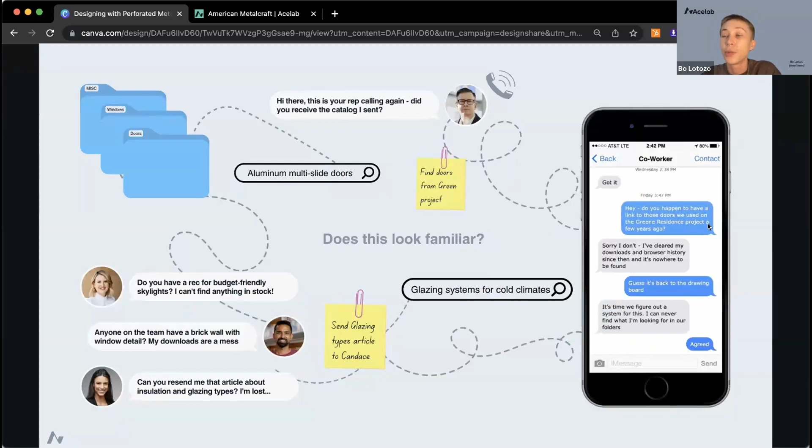So this is a little example of some of the workflow issues that we were looking to solve. So the ability to get in touch with people at the right moment, to find information on products from past projects, and to really just have one place where you can go through your whole specification workflow, from the research stages all the way to the contacting professional stages, all in one place, as opposed to spread out over Post-it notes and text messages and different project files.

All right, so with that, I'm just going to jump over to Acelab, quickly show you how to find American Metalcraft and get in touch with them. And then after that, we're going to get started with the portion of today's event that's the AIA-approved course. All right, so once you log into your Acelab account, you've got a handy dashboard of all of the work that you're doing. We've got all of our searchable product categories up here, so you can use these to discover and explore all of the products that we have in our database.

And if you know exactly who you're looking for, you can use this search bar right at the top. Type in the name of the manufacturer that you're looking for. That'll start to populate with some options. And then you can just head right over to their page on Acelab. You can get in touch with them directly here using this handy little contact button, and you can explore their products, their information right from this page. So this is a great way to explore and evaluate their products.

You can save them to your account, save them to your projects, and really have all of your research, your organization all in one place, and you can even message through the Acelab account as well. So it's a super great way to get in touch with manufacturers and to keep that information organized.

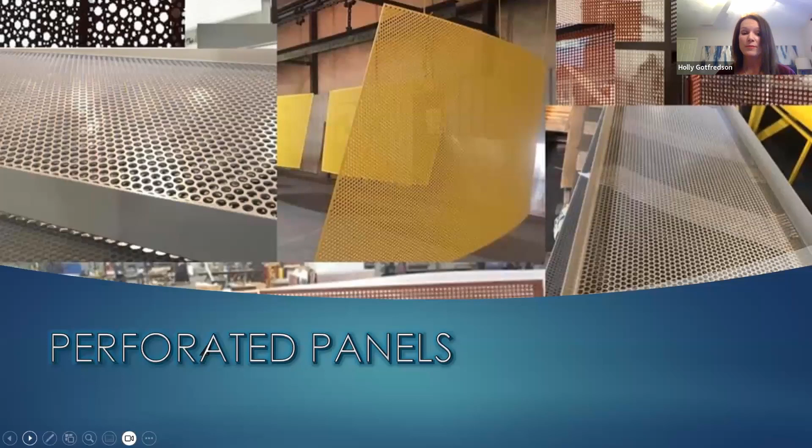So let's jump into today's topic, perforated panels. We have a couple of learning objectives that we want to achieve today. We want to talk about the difference between coil coat and post-fabrication finished products. We want to understand the basic decisions, how to choose a perforated product, and how each of those will affect cost. Looking at the different pattern options that may be out there, and also want to understand how those pattern options affect flatness, metal thickness, and also how we're going to assemble that and attach it to the building.

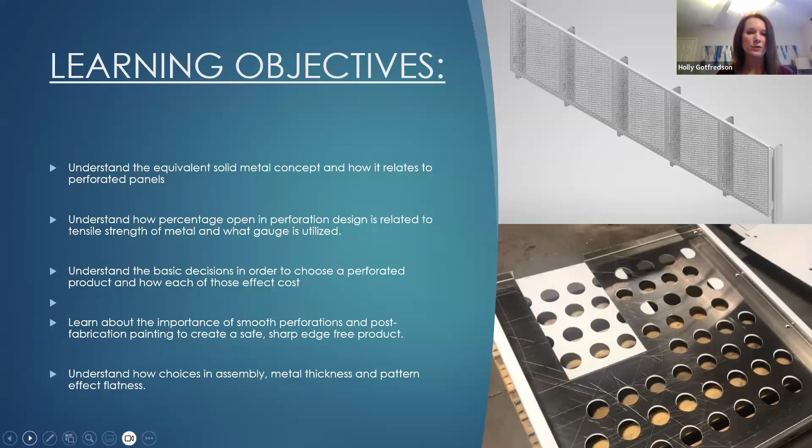So some advantages of using solid plate aluminum products is it's 100% recyclable and non-toxic. It's impact resistant, it's non-sparking and non-magnetic. And most importantly, it's non-combustible. So solid plate aluminum is NFPA 285 compliant naturally. It does not burn. We also have PVDF coatings, which are applied to those solid plate aluminum products, and that PVDF coating self-extinguishes. It has a very good strength to weight ratio and can be joined in many ways.

So we've noticed some confusion in the market about the differences between coil coat and plate. Most coil coat is going to be a thinner gauge. You may be looking at, what's the difference cost-wise between those two products? Well, with coil coat, let's start with the modules that you can make with that. The modules typically are going to be very small, 1 foot by 1 foot in terms of panel size. And if you get larger than that, you're going to have to add stiffeners. And those stiffeners being added to that are going to increase your cost.

So it's better to go with the correct gauge for the engineering criteria and for the wind loads than using a thinner gauge to try to save a little bit of money. And then when you add those stiffeners back in, you still run the risk of getting read through or pillowing. The other difference, especially when we're talking about perforated products, is the interior of those holes. So when you perforate solid aluminum plate in its raw form, you're going to punch everything out, and then you're going to post-fabrication finish it, meaning that all those holes are coated inside and out, so there's no rough edges.

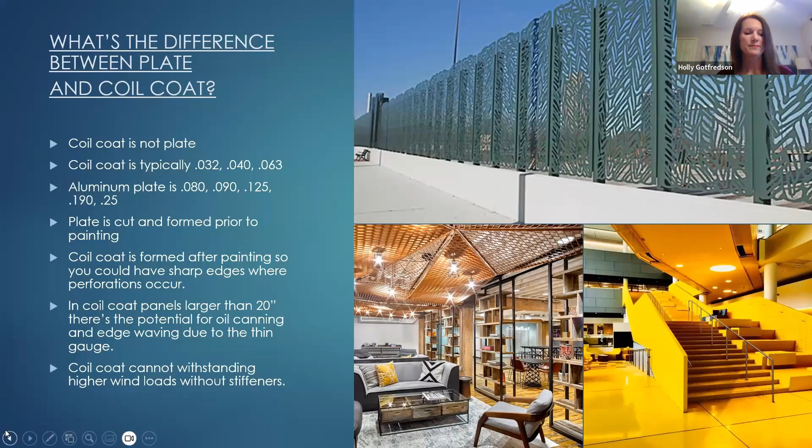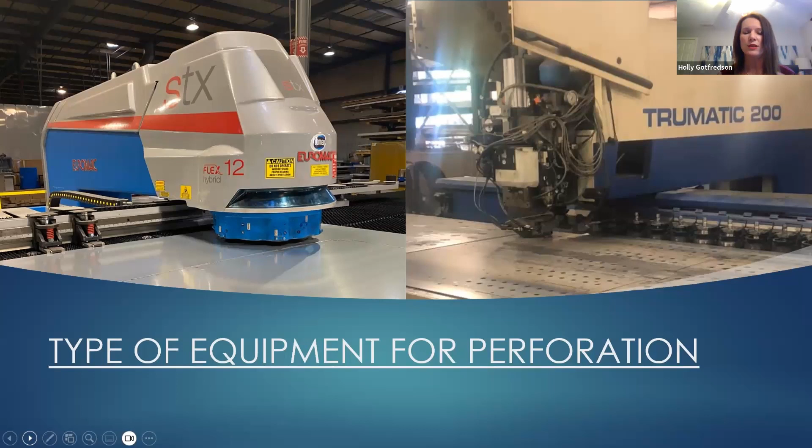You can also put a gang punch in those so that you can hit a panel once but create multiple perforations. So this is a good economical way to achieve a perforated product. Another way to do that, a little bit more on the higher end of things, is going to be a water jet or a laser type cut.

With a water jet, you can do a Harley Davidson logo, a corporate logo, all different types of signage. If you want a custom perforated pattern, let's say you want to have different hole sizes on the same panel, this is the machine that will allow you to do that. So the possibilities are really endless when it comes to creating a unique look for your project.

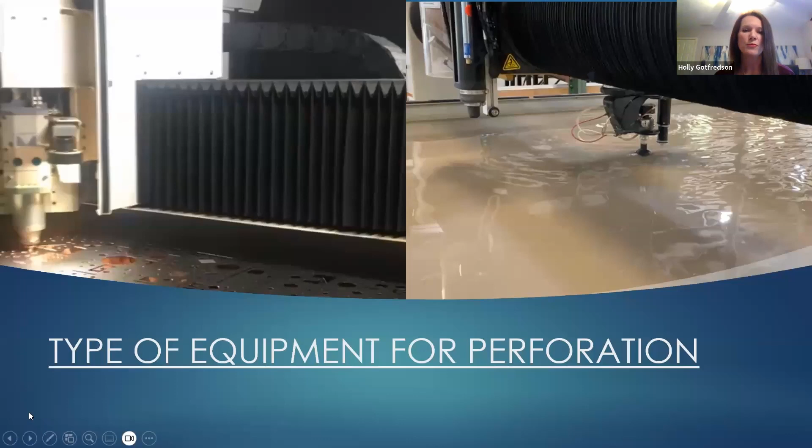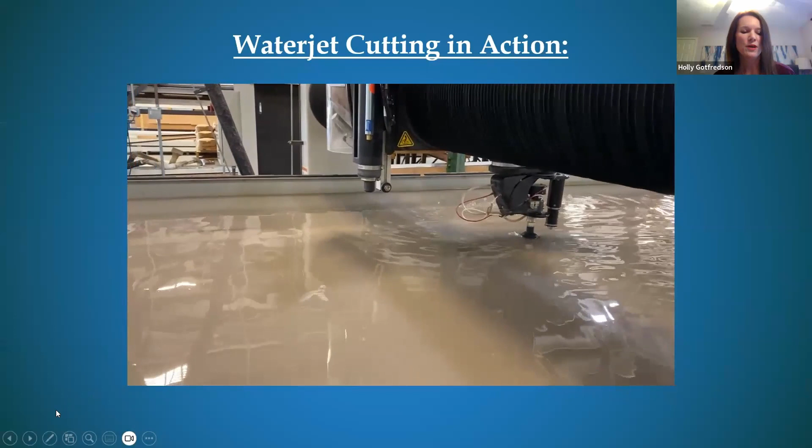Let's see if this video will work. Here's the water jet in action. We actually purchased one in 2020. It's the largest bed on the market. It's an Omax, and just killer technology. We're really loving the capabilities of what it can do.

Definitely, we want to talk about NFPA 285 and combustibility. I know most of us are probably familiar with what happened in Grenfell Tower. There was some ACM that had not been tested that was part of that exterior cladding. Unfortunately, that went up in flames very quickly and a lot of lives were lost.

So when you're considering different types of exterior cladding, you may have less expensive options. The right option may be a little bit more expensive, but you definitely want to consider the safety of the occupants and the longevity of the building. Solid aluminum plate panels are a great way to go because, again, they're non-combustible, they don't burn. It's just a great product where you can really feel comfortable about that choice for your project.

Let's talk a little bit about this: there are some products that are flame retardant, some that are flame resistant, and non-combustible. Typically, ACM and MCM are going to have a core with two thin sheets of metal on either side. That core may be fire resistant or fire retardant for up to 30 minutes. But the core is a lot of times made with plastics and things that may not be recyclable upon decommissioning of that building.

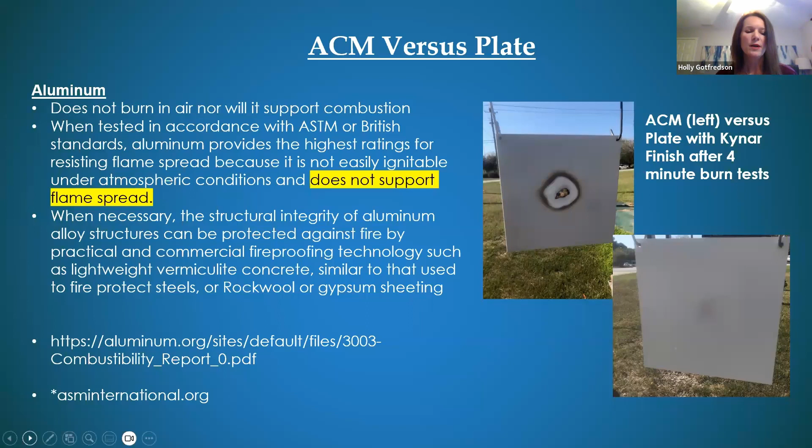So when you're talking about, again, perforating something, with solid aluminum plate, because you can post-fabricate finish that, you're assured that all those edges are coated, versus an ACM panel or a coil coat type panel where you're going to have exposed edges.

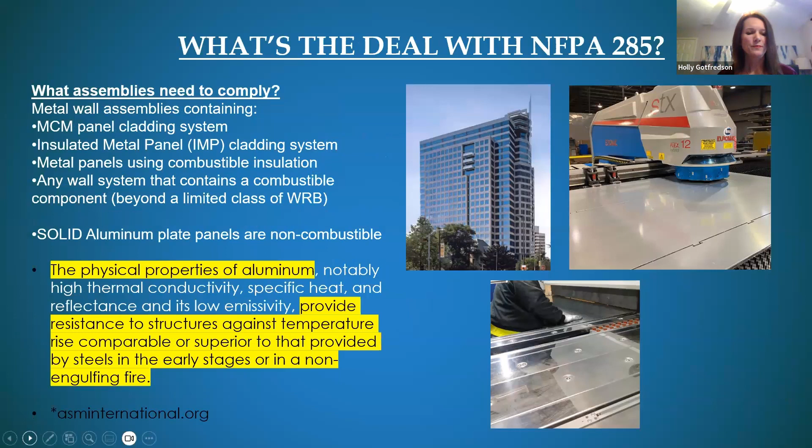So let's talk a little bit about the equivalent solid metal concept. The more openings and holes that you have, the less strength you have inherently in the metal panel. However, using thicker metal can sometimes offset the weakening of a more open pattern.

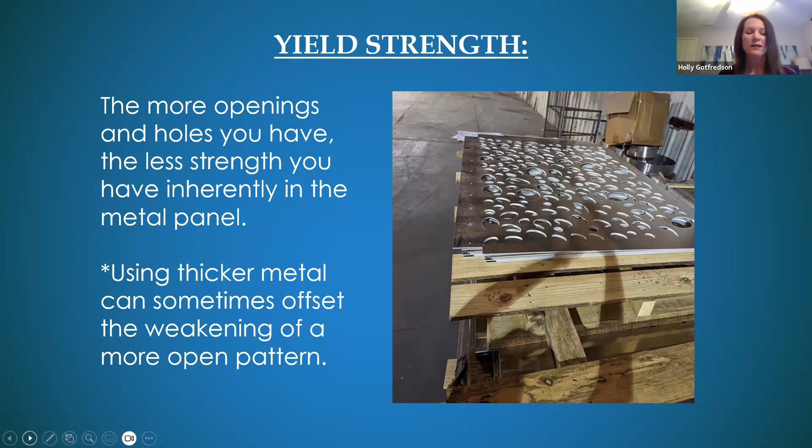So definitely have a conversation with your panel manufacturer, with your perforated products manufacturer, if you have an idea for a pattern but you're unsure how that's going to affect the strength to weight ratio, the openings and the brittleness of the bars in between. Definitely have that conversation so that you can choose the right gauge and choose the right pattern.

And here are just two easy rules of thumb for perforations. The hole diameter should be greater than the material thickness, and the bar width should be equal to or greater than the material thickness. So, Scott, do you have anything else you'd like to add as we're going over choosing perforated patterns?

Yeah, well, one thing to keep in mind is a lot of folks, sometimes the first time they see some perforated examples, they see all these tiny little holes, little 1/8 inch or 1/4 inch holes. When you get away from the building, they tend to go away. We kind of call that cheese grater patterns. We try to stay away from that.

Generally, most of these projects you're about to see are using a 1-inch hole when they're round holes, and that becomes pretty nice from street level view. So be very careful of those tiny little holes, and again, metal thickness is critical as well. I don't think we do much of any real exterior perforated panels that are less than 1/8 inch, 0.125.

I know we're looking at one to provide for MARTA that's going to be beefy, up to 1/4 inch. So, and like Holly said, a conversation with your panel manufacturer can help with that. But stay away from thin metal and tiny little holes.

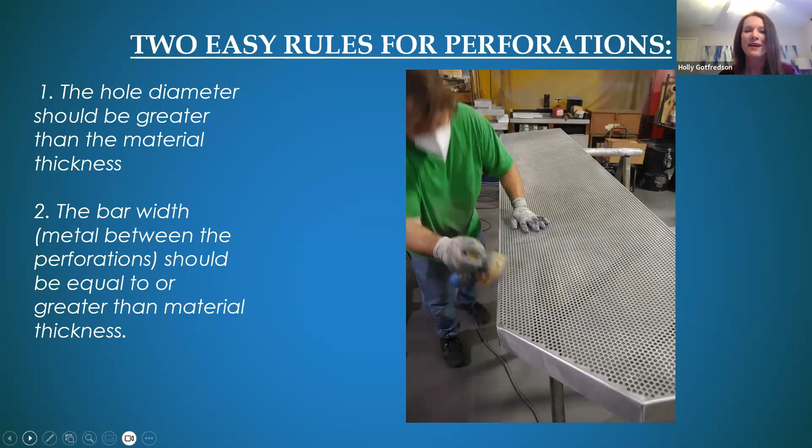Yeah, for sure. Thank you, Scott. And by the way, that's Scott Sampson, our national sales manager. He's coming to us today from Alabama. So thank you, Scott. How y'all doing?

So definitely something to think about is your panel size. What you want to do, especially for budget and using the material to the highest and best use, is to think about the standard sheet sizes that aluminum comes in. And you're looking at them right here on the screen, 36, 48, and 60-inch wide. So if you're thinking about doing a perforated panel with flanges, you want to allow 3 inches on either side for those flanges. So if we're thinking about a 30-inch face with 3 inches on either side, boom, we've hit that 36-inch mark, and we've used 100% of that panel.

Now, of course, if we're not there, let's say we get a module on a project and we unfold it and it's maybe a little bit over one of these standard widths. So let's say instead of 48, it's 49.5. Well, we just missed using a 48-inch sheet, so we're going to have to go to 60-inch wide. So there will be some drop, which of course will be 100% recycled, but there was an opportunity for us to save your customer money there. So it's just a great thing to think about when you're planning out your wall systems or panel modules. Utilizing these widths to the highest and best use will save money in the long run.

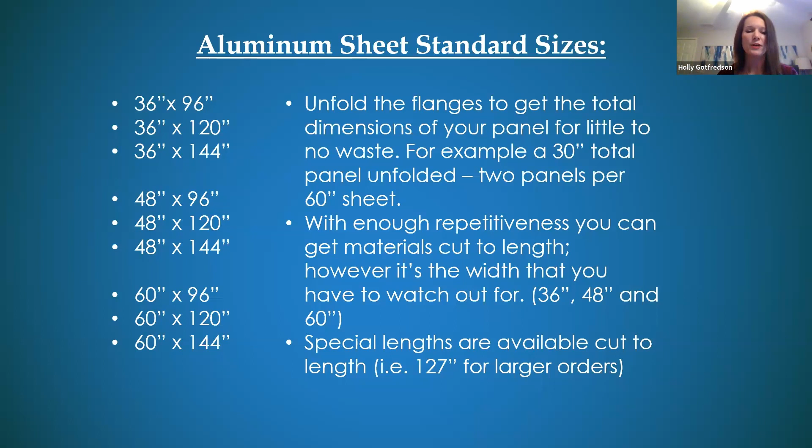We do have a chart of this on our website, so please feel free to use that as a resource. We have a frequently asked questions tab under one of the menus that you can go under and see these, along with some other really good Q&A type answers there.

Now, I didn't mention 72-inch wide, and that was on purpose. You might remember in 2017, 2018, when we had the metal tariffs, 72-inch wide had a pretty long lead time before that, but once the tariffs were implemented, we had a lot of peaks in the metal market. The scarcity of that material increased. And then add COVID to the mix, and it increased even more. So it is available, but please talk to your panel manufacturer before you commit or really get married to the idea of having this size panel module, just to make sure that that material and that width is available.

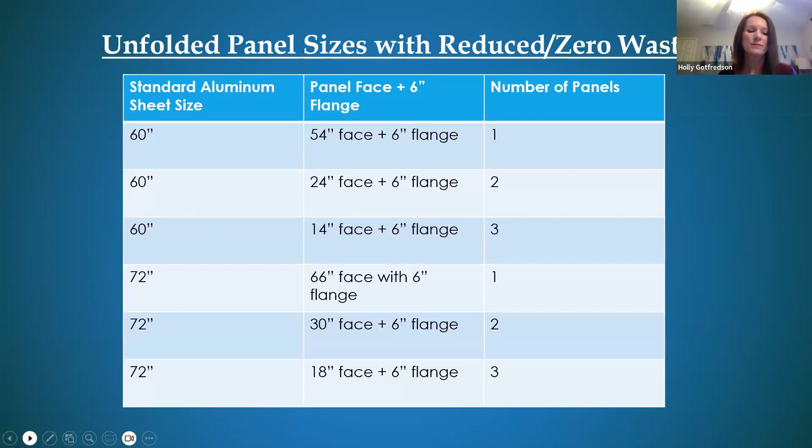So just some things to keep in mind as you're thinking about perforations for your project: the hole shape and pattern. The shapes created with the punch are going to be the most economical. Hole size, the spacing of the holes can't be less than the thickness of the metal. Again, we want to avoid anything getting too brittle, too thin that could break. The bar size, exact same reason. Don't go thinner than the 1-to-1 ratio with sheet thickness. Really think about your percentage open. Definitely try to stay under 70% so that we're not weakening that metal too much.

You want to keep your borders to a minimum to reduce distortion. And before specifying a custom pattern, definitely talk to your manufacturer about tooling, runtime, available material, and also pricing. This is a great opportunity for a manufacturer to really help you out.

If you've got a pattern that may be super intricate that you are just in love with, but it may be outside your budget, there may be a solution that lies in between, and that's a great conversation for you all to have. We offer design assist. I know many in the industry offer that, so that's just a really great opportunity for you guys to work together and come up with something that's going to be beautiful and economical for your project.

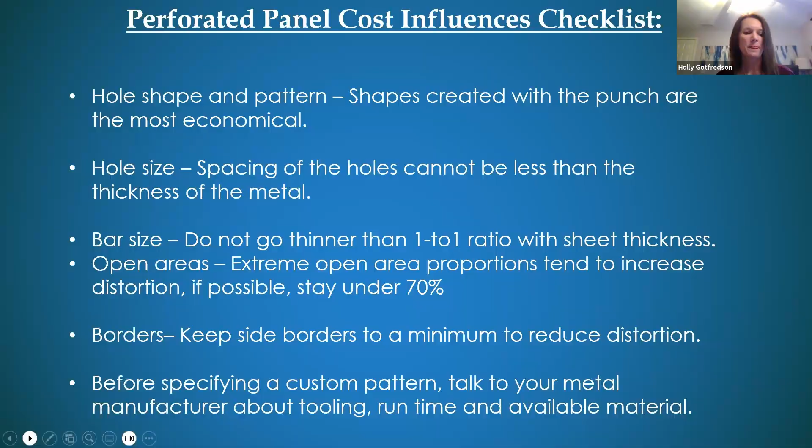So the aluminum metal standard sheet gauges are .080, .090, .125, .190, and quarter inch. And typically we see, for the most part, it's going to be .080, .090, and .125. Those are the ones that we see most often. When you get up into quarter inch, a flanged edge condition is not going to happen because that metal is super thick. So that's going to be a sheared edge condition in all instances. And the limiting factors of gauges are going to be the size of the panels and the wind loads.

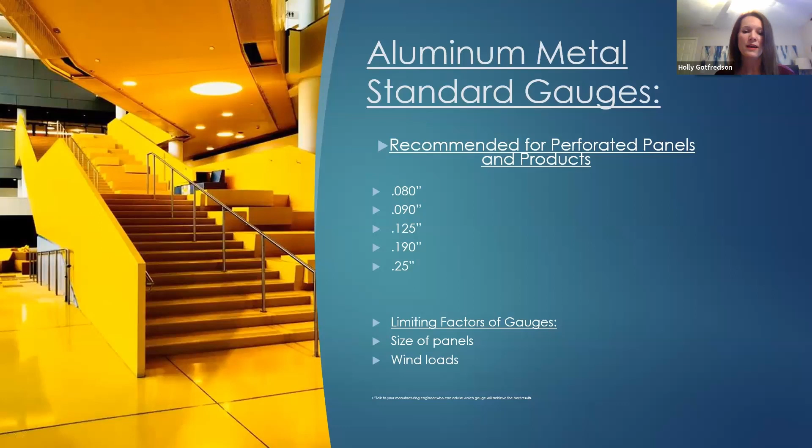And also you want to consider the processes that occur with anodizing versus, let's say, liquid painting. Anodizing is a chemical process. It's pretty harsh. It's very tough on the environment. You also may run the risk of what's called checkerboarding. So typically your perforated product or panel is going to be dipped in a dip tank for that anodized finish. If you look at panel 1 versus panel 500, there's definitely going to be a difference in color and finish.

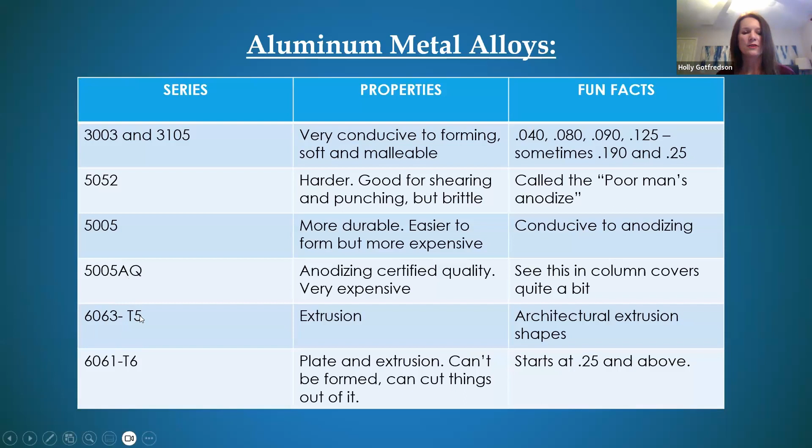So different types of examples of perforated options and projects. There's a couple of different ways to attach. We're going to talk about structural versus face fastening today. You'll see examples of that. On this particular project, we utilized 1-inch round holes. It was about 47% open.

We've definitely noticed an increase in popularity with wellness campuses in particular. We've seen an uptick where, for the parking garages, the architect and the owner really want those screened. And so perforated panels are a great way to do that, to really create an aesthetically beautiful structure that flows with the rest of the campus. And again, there are limitless options as to what perf pattern and what types of colors you may want to add to your project. So it really does give a lot of leeway there for creativity.

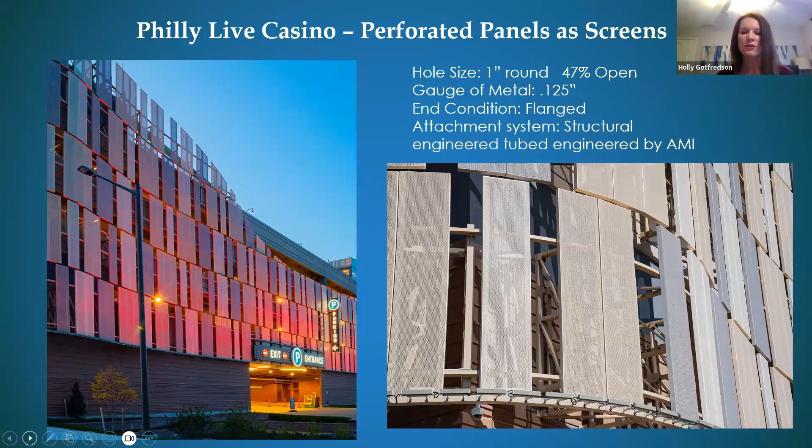In this instance, the end condition is flanged. This was a project where we created the structural tubing system. So we engineered, fabricated, and finished everything you see here. We worked with the concrete vendors pretty closely to find out where the embeds should go, and spent months with our engineering team and their engineering team creating a structure that would meet the needs of the project. Scott, do you want to talk a little bit about the details here, and I'll just flip through as you go?

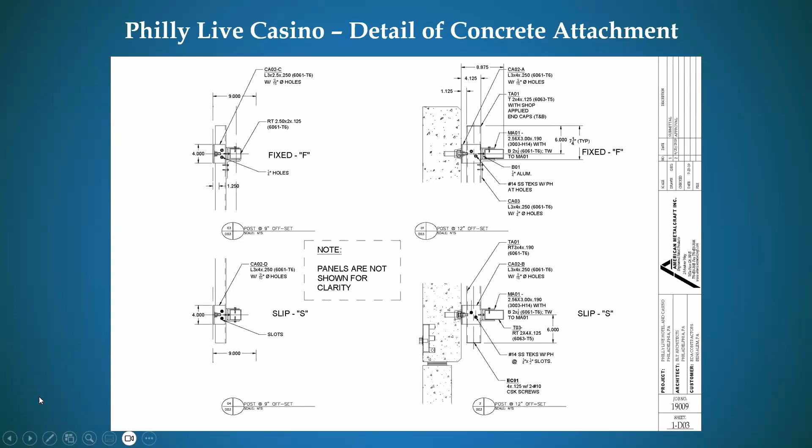Oh, sorry, I've been typing answers to questions here. We got some good questions coming in. Oh, good. Okay.

Yeah, there's a lot of different ways to attach perforated panels. It seems that in a lot of conditions, we're attaching the overall system into concrete. This particular project was for a parking garage, and through the details you can see the anchor bolts going to the concrete. We got together with the concrete folks, figured out the strength of their concrete, where their embeds are, and did various calculations to determine how often we need to fasten into that concrete.

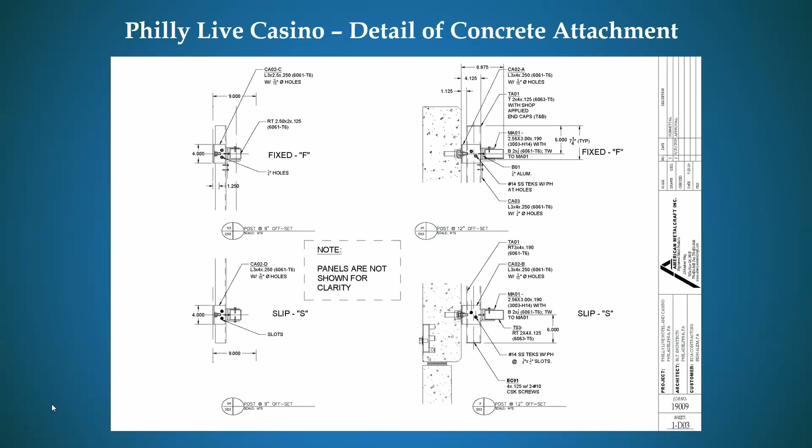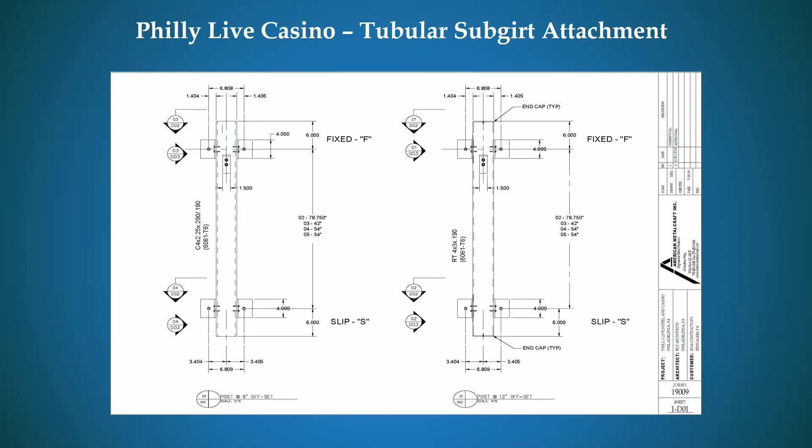Now this system is probably one of the more complex systems that we've done. The architect wanted the panels to stand off the building, and this support metal to be part of the feature of it all. We figured out all the support metal required to support these panels and keep them, I think, over a foot off the building in some areas. And in some cases, the perforated panels themselves cantilever off the bottom of the support system nearly 40 inches. So if you think that's an awful lot of backup for a perforated system, those are the reasons: big cantilevers and off the wall by over a foot.

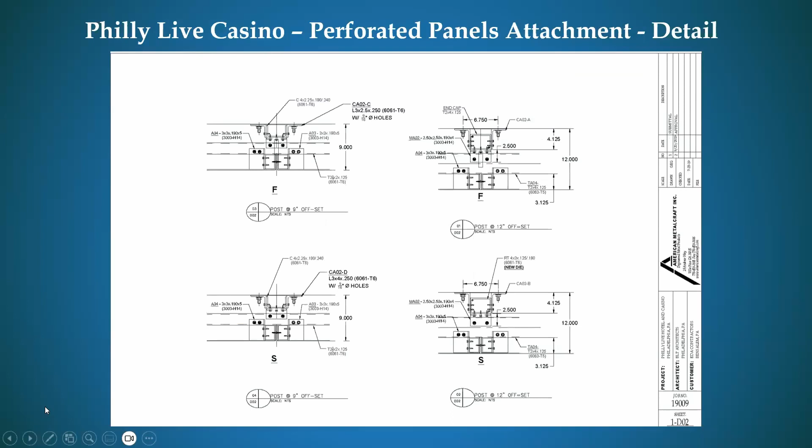In this case, we got together with the engineers and the concrete folks, calculated it all out, and provided the support system. As you can see here at the curved area, it really stands off. All that was painted in-house, along with the perforated panels. And those holes are 1-inch holes. The next project was 1-inch holes as well. So when you get away from the panels a little bit, the holes tend to go away a little bit. So there you go.

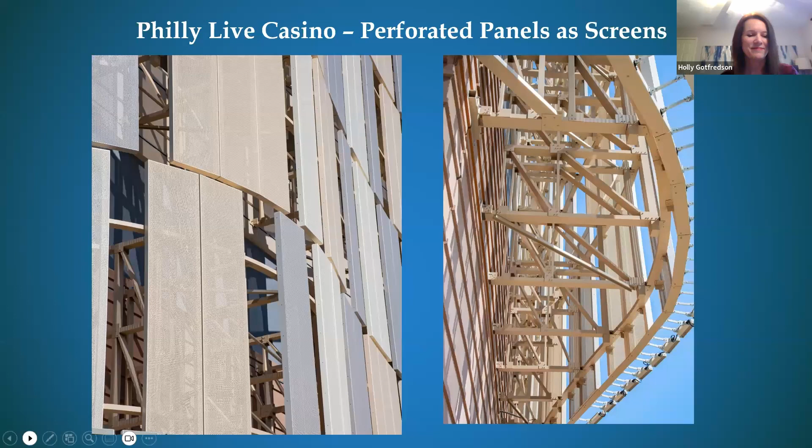Thank you. Yeah, so I love this example. This is another way that you can utilize perforated panels over glazing. It's a great way to shade a room without completely darkening the space. Sometimes we've seen awnings used and the occupants feel like they're in a cave, so to speak. It's really dark; it keeps the sunlight and heat out of the room, but this is a really nice happy medium. It cuts down on the heat, gives the occupants a little shade, but they can still see outside. It creates some really nice shadows.

It's a great opportunity for a custom design, maybe a logo, maybe a landscape, if you want to create those shadows as the sun moves in the room. So there's a lot of opportunity to do really creative things with perforated panels over glazing. Here, this was a sheared end condition. These were face fastened. And we were getting ready to start fabrication, and somebody said, wait a minute, since these are over glass, how are we going to remove the panels? Scott, can you tell us a little bit about that? I think we did this in partnership with NBBJ.

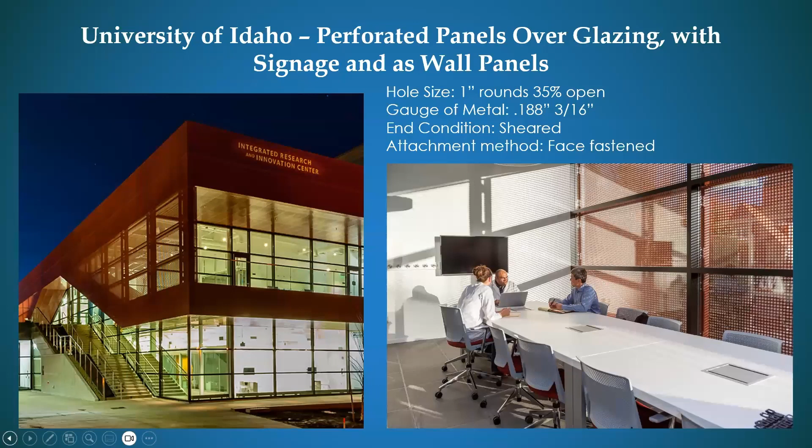Yes, this was NBBJ out in Seattle. On these architectural drawings, there really wasn't a real attachment point, which was fine. So we took the drawings and came up with a system that would attach, in this case, to a knife edge attachment point coming off the curtain wall. If you go back to that detail, yep, there on the upper right you'll see the perforated panel, and we needed to make sure the panel was going to be strong enough to withstand the wind loads and stay flat.

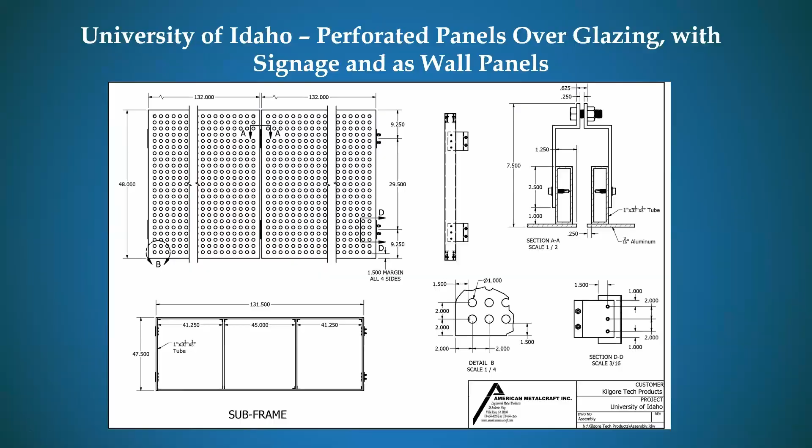So we developed a support system around the perimeter of the panel, and then it attached back into an angle that attached to a knife edge coming off the curtain wall. And Holly, they decided we might need to make these panels removable in case the glass needs cleaning. So right before production, we scrambled and came up with a way where those face panels can be removed from the framing system, so you could get back to the glass and maintain it. So there's another way to attach perforated panels. Yep, great, thank you.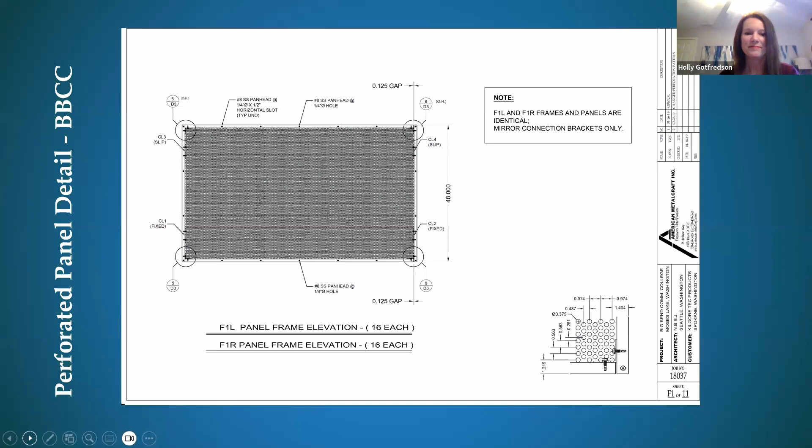Now, this was a really fun project. We love to kind of dive into new areas. We had never been asked to do perforations as well as dimpling, but this was an opportunity for us to try that out. So the architect really wanted something unique. This was for the Navajo Tech University in Chinle, Arizona. So we did a couple of iterations of this to figure out, okay, how's the best way to achieve this look? And by the second or third time we had figured it out, we created a new capability. And you can kind of see it right there if I zoom in.

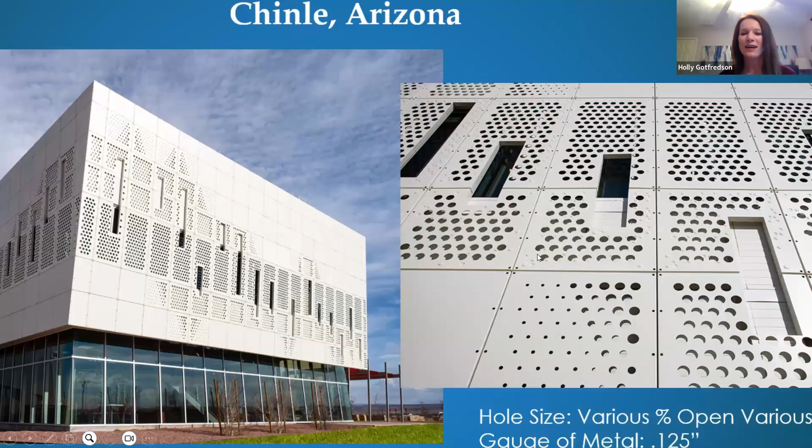It's a very subtle difference and it's a very subtle detail, but it really is a unique look and, oops, turned out beautifully. And my slides just went wonky. Well, let's see. All right, there we go.

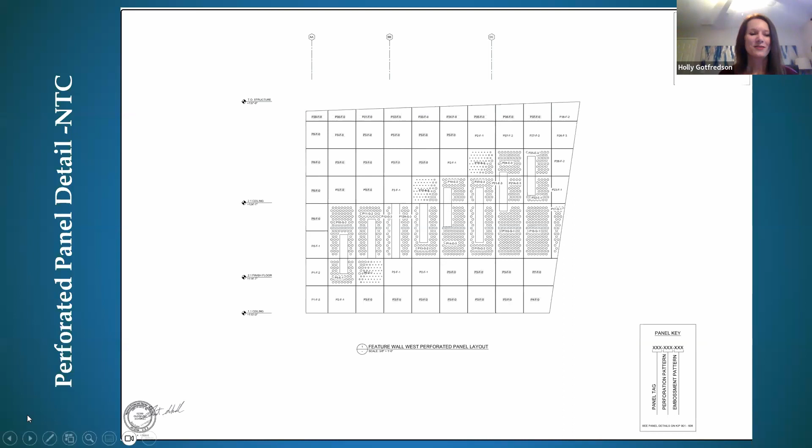Yeah, there's a nice close-up picture of it as well. So again, perforations in general just give you so many avenues to do creative products, so to speak. There's a couple of details of that. We kind of had to look at each window and create custom panels around that.

So here's an example of using perforated panels as infill panels for a staircase. And again, it's just a nice architectural element. This was a super bright yellow. The perforations are all coated on the inside, so there's no chance anybody's going to cut their hand on an exposed edge. I will say we did recommend a thicker gauge for this.

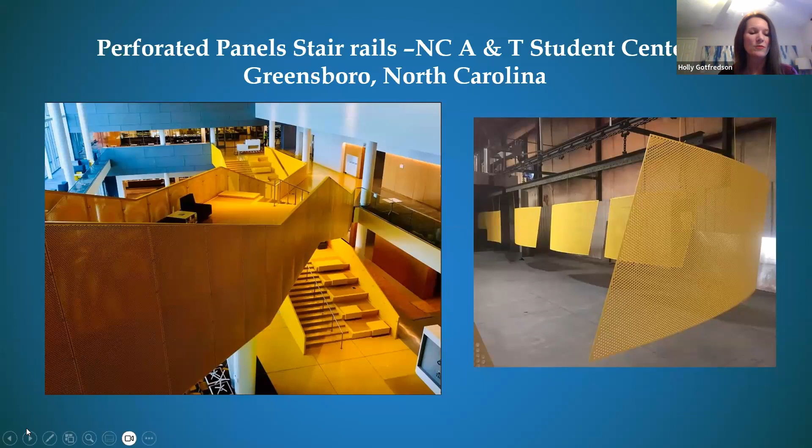We are always looking at deflection standards and making sure we can get the most flat panel possible. But our recommendation was not taken, and so they wanted the thinner gauge, so you can see a little bit of a wave there. But again, that's why, when you have those conversations with your panel manufacturers, definitely listen to the recommendations to achieve the best look possible for your project.

This is Westminster High School. Here you can see perforated panels as a structural railing on the top of the building. This also had our RS400 Miami-Dade rated panel system in the vestibule. I remember wondering why in the vestibule, but it's, you know, teenagers. They're going to have book bags. They're going to have sporting equipment. They're going to be roughhousing as they're walking into school. So sure, Miami-Dade system works for that, I think. It'll last a very long time and stand up to a lot.

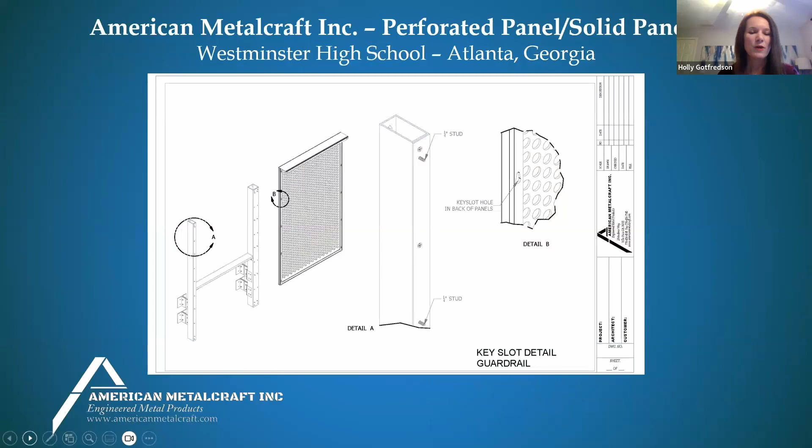So there's a couple of details there of the perforated panels on top. And the attachment method was a little bit different on these. This was a face attachment with a keyhole hanging system. So you can see there's a variety of ways to install these types of products.

And then you can also use perforations in custom sunshades and fins. That's another great way to save some energy off the building and also create a nice focal point for your project. Excuse me. In this instance, we did some vertical fins on the Trident Aeronautical Center. So it creates a little bit of shade for the occupants, but it also looks really nice and creates kind of a focal point there.

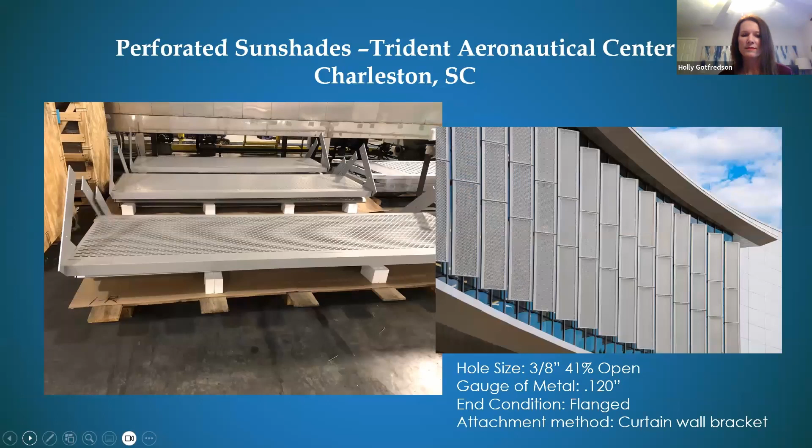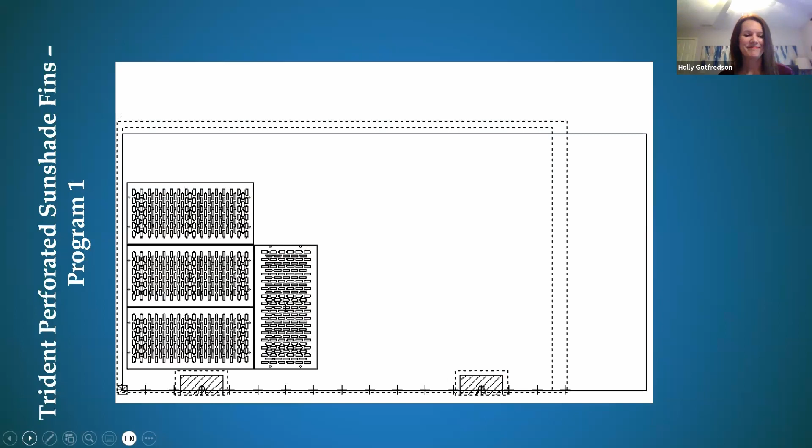And Scott, can you talk a little bit about this install and how we were looking at manufacturing these panels? I know we did work pretty closely with the installer, and we try to do that with every project because we want, of course, for the installation to be as easy as possible to save time and money.

Yeah, I guess one of our strong points as a manufacturer is the ability to help out with design and engineering. Design assist should be a big part of any good manufacturer. And in this particular case, there's some big spans here that we were concerned about, and we had to incorporate some extra members coming off the building to reduce the span of these panels.

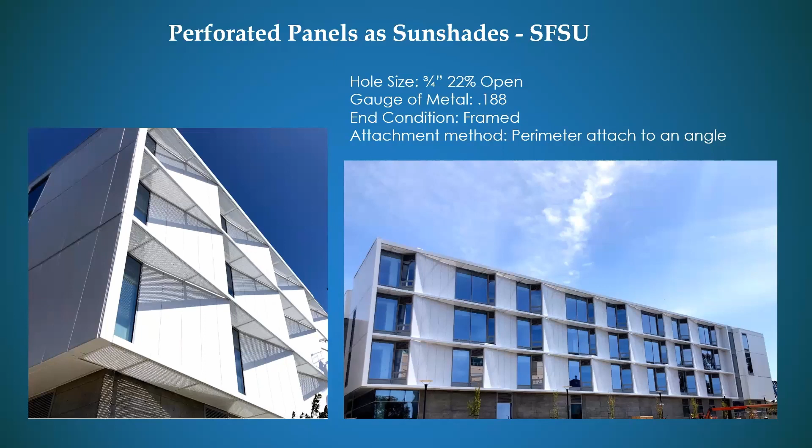But when you look at these kind of systems, whether it be perforated panels or solid aluminum rain screen panels, you need to look at it from not just a manufacturing standpoint, but an installation standpoint as well. So when we get somewhat into design assist, but certainly when you get into the shop drawings, you want a manufacturer that is not saying, oh, well, maybe they should have thought of this or that. You want to make sure it's clearly shown on your shop drawings how these panels are to be attached, and in a fashion that the installer can actually achieve what's drawn on there. And a lot of that went into this piece as well.

Definitely. Thank you. These are a couple of the details for that project here.

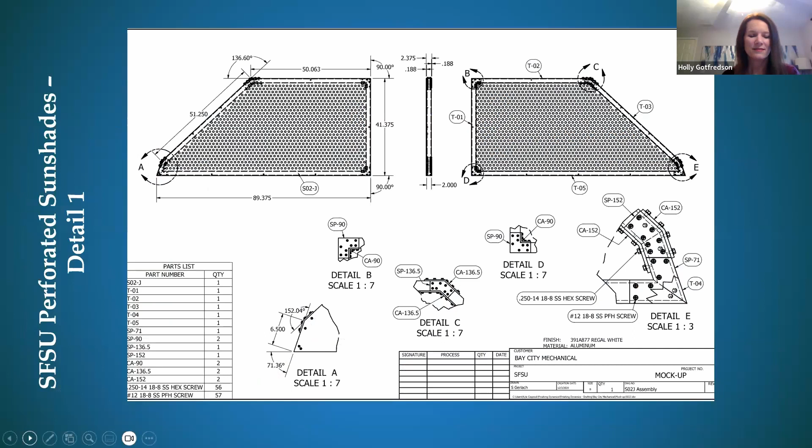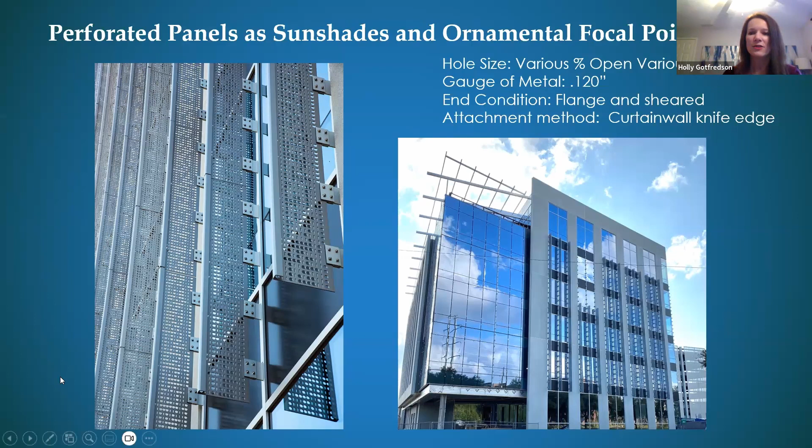And then here we have some perforated panels as sunshades. Now this is a very simple fin. It's a really nice perforated pattern, and then some industrial clips attached to the glass there and the curtain wall. And so it really turned out beautiful. It's a very simple design. It was on a tech center in Charleston, but it really does add a nice detail overall to this project. And the end condition here was flange and sheared edge.

And then, of course, if you want to get into custom cutting, here's a couple of examples of that. On the left-hand side, we don't do a lot of steel, but in this instance, the customer required steel panels for an interior application. We have a lot of different hole sizes, so these were created on the water jet. On the far right-hand side, you'll see a custom pattern, kind of a leaf pattern. This was one of our first water jet projects. This is the 14th Street Bridge in Atlanta. So you can create really nice organic shapes in addition to the variety of size holes you see on the left-hand side.

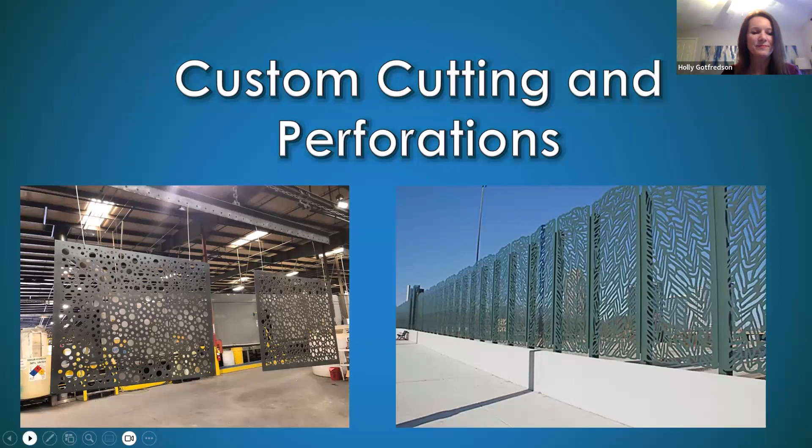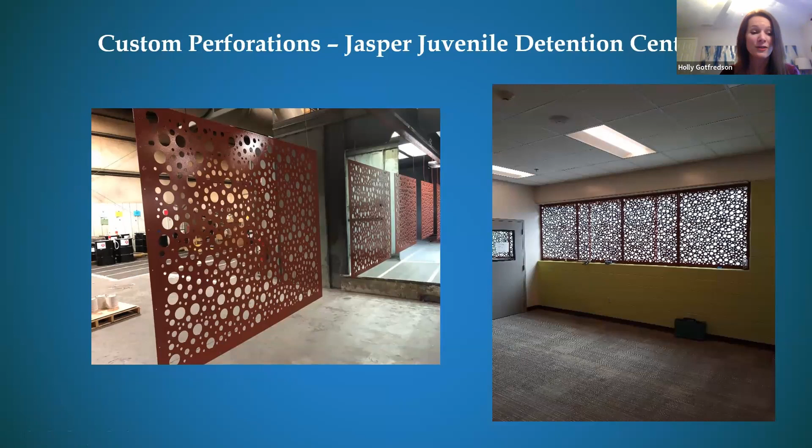And here are those steel panels going through the paint line. And on the right-hand side, you can see them in application. Unfortunately, this was for a juvenile detention center, the waiting room. They wanted it to be beautiful, but they also wanted it to be safe and secure. So they had requested steel products for that purpose. There's a couple of drawings of that.

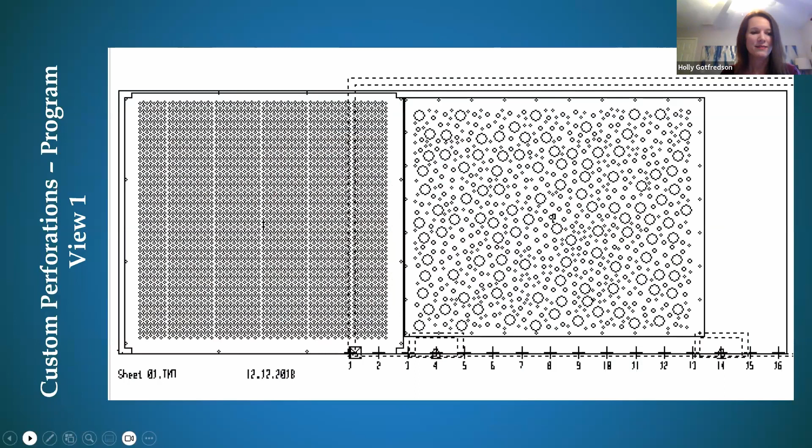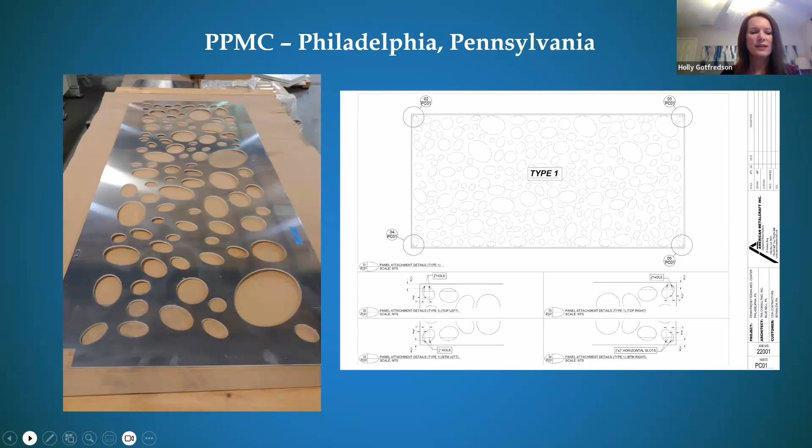So this is another parking garage project that we had in Philadelphia. We just wrapped that up spring of this year. Really cool custom oval pattern. Did about 900, I believe, panels with the attachment system for this project. Just again, showing the variety, showing some options of things you can do on different structures.

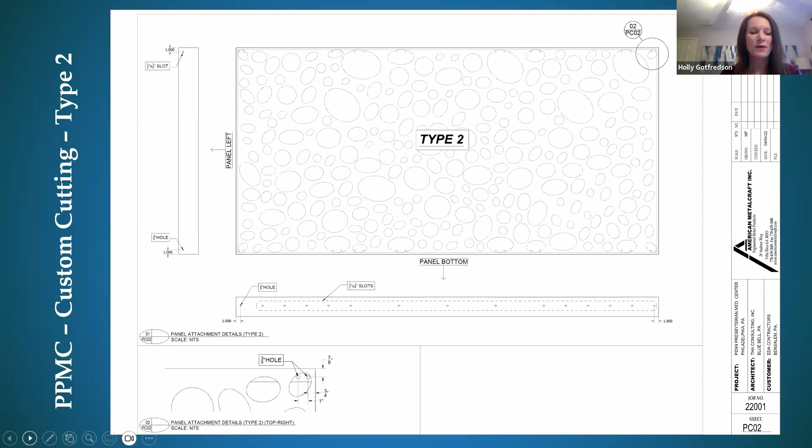I mean, perforated panels are great as a screen for just about any application. Parking garages is where we've seen it a lot, but restaurants, hospitality, healthcare, if you want something that's semi-private, that's a nice way to add an elegant touch, and also allowing light and air through.

So when you're looking at perforated products, something else to consider is the coating. What coating is going to be the correct one for your project? Definitely, we want to know what's the location. Is it going to be something that's on the coast versus something that's in the Midwest, let's say? Those two locations are going to require different things. When you're thinking about the coastline, you're definitely going to want a 3-coat or 4-coat application for that harsh saltwater environment.

Also to consider is what's the warranty requirement? Let's look at all the paint manufacturers and see which one of the big three has that warranty that you require. Also looking at exotic colors, thinking about, does your project require a warranty? You may love this super bright, vivid blue, like over here on this right-hand side picture, but the paint manufacturers themselves won't offer a warranty on exotics that are extrusion coating applied. And one of the reasons for that is they have to add a lot of different minerals in order to get that super vivid color. And so they don't offer a warranty on those.

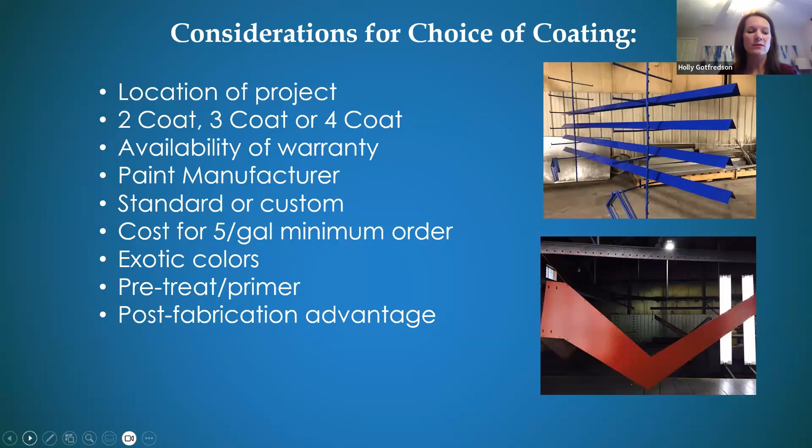So PVDF, and this is the full word, and I am not going to try. I'm not even going to go there because my Southern will get in the way, and I have never been able to say this word as long as I've been in the business. So I'll just keep it as PVDF for short. But it's a great coating for these reasons listed.

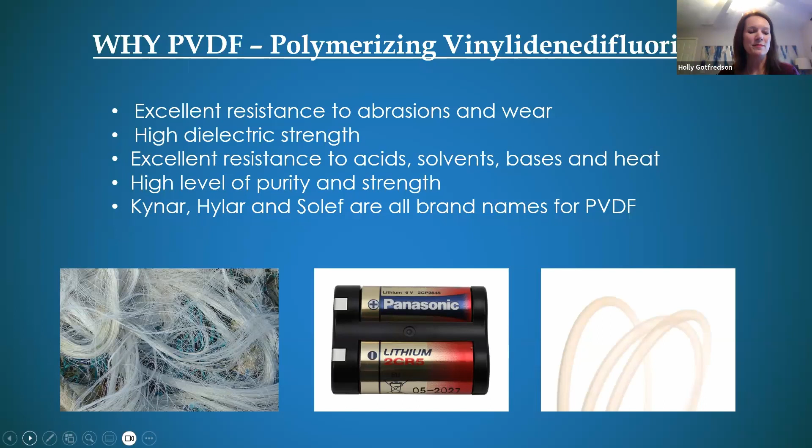And what's interesting about it is I learned during the supply chain shortage that a lot of the PVDF resin was going to the electric car battery industry. And that's because it's such a great coating that all the electric car batteries use it. It's also used in special fishing wire as well as medical equipment. And it's just a great coating for building products because it lasts a super long time.

During the pandemic, when there was a shortage of PVDF, we pivoted and discovered another capability that we could offer. So when maybe PVDF was going to take too long to get in, we could also offer FEVE. Some more words I can't say, but FEVE is a great coating. It has a little bit more gloss to it.

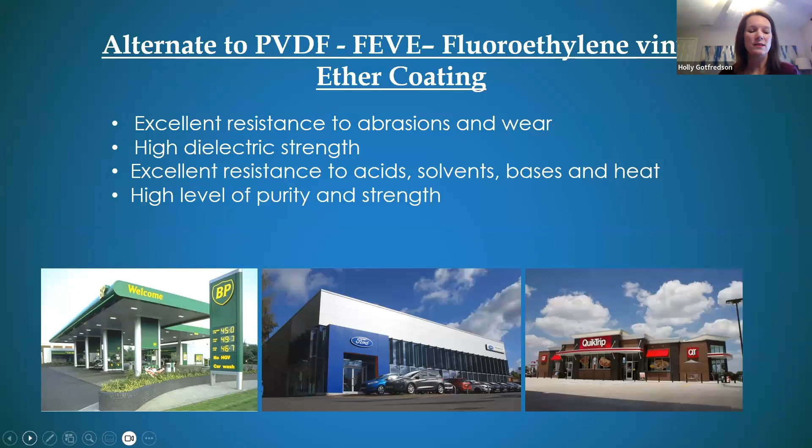Now, I will say it's 15 to 30% more expensive than PVDF, but if you're really looking to get a bright, vivid color, maybe we can't find something in PVDF that really is to your liking, this may be another option for you. So again, just a great conversation to have as you're thinking about schematic design and then getting into construction documents.

So definitely, we talked about exotics. We talked about all the different types of paint that are out there. PVDF, you can do micas, metallics, you can do two-tone. There's some wonderful color shift products that are out there that are available in extrusion coating. Just a variety, endless types of options.

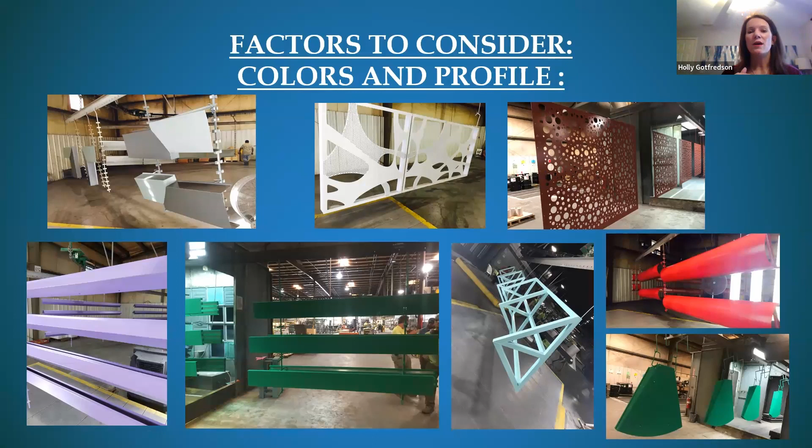So that's exciting. But again, let's talk about the location of your project. If it's going to be in the middle of a super arid environment that gets tons and tons of sun, you may not want to go with an exotic red. You may want to choose a little bit more muted red, more muted color to make sure that that quality lasts a lifetime.

And just a quick difference between horizontal and vertical lines. On the left-hand side, you'll see a vertical paint line. This typically is utilized for extrusions. They're going to paint one profile over and over again. Typically, the max height on this is 24 feet in length. On the right-hand side, you'll see a horizontal paint line, and that's going to be able to paint a variety of profiles, a variety of shapes. Our paint line, we can paint parts up to 38 feet in length.

And something I'll mention here also is, let's say, for example, you have one color for your entire project, and you're getting your extrusions painted at a vertical line, you're getting everything else painted at a horizontal line, and you have an extrusion that's being put next to, let's say, brake metal, and the color looks slightly different, even though they're the same color, and that's because the processes are different. That's called pigment flop.

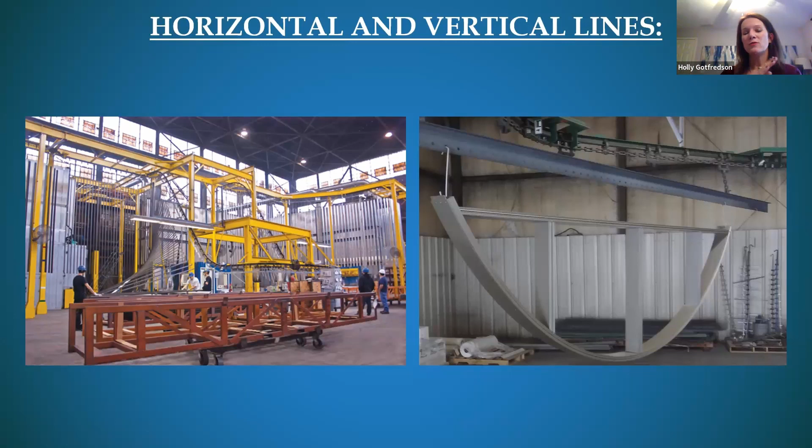So if you want really nice cohesiveness, have everything painted at the horizontal paint line. All the deltas are going to be exactly the same, and everything will be perfect and seamless in terms of color. If that's not possible, we recommend using a complementary color if you think that your vertically painted pieces are going to be next to some of those other pieces coming from a horizontal line.

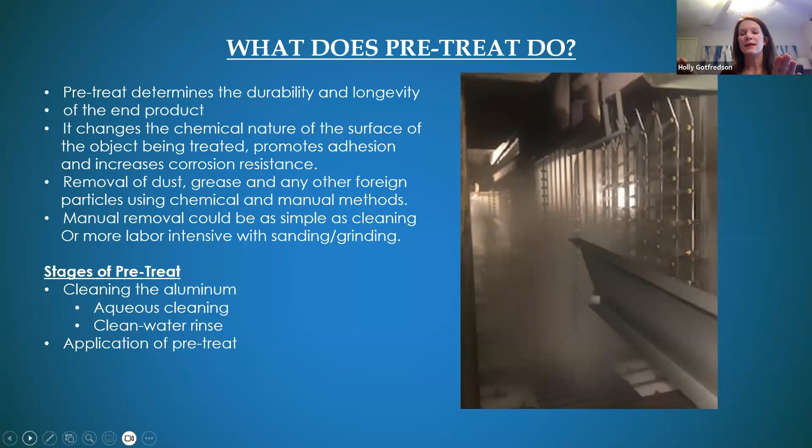We talked a little bit about the pre-treat. It's primarily just after the metal has been cleaned and prepped. It's run through a 5-stage pre-treat system, and that pretty much gets off anything else that's left on that metal. And it's an etching process. When you paint metal, it's not going to be like you went to Home Depot and bought a can of spray paint and you're painting maybe your metal furniture that's outside on your patio. For architectural purposes, this process creates a surface that the paint adheres to. So this is a very important step in the painting process.

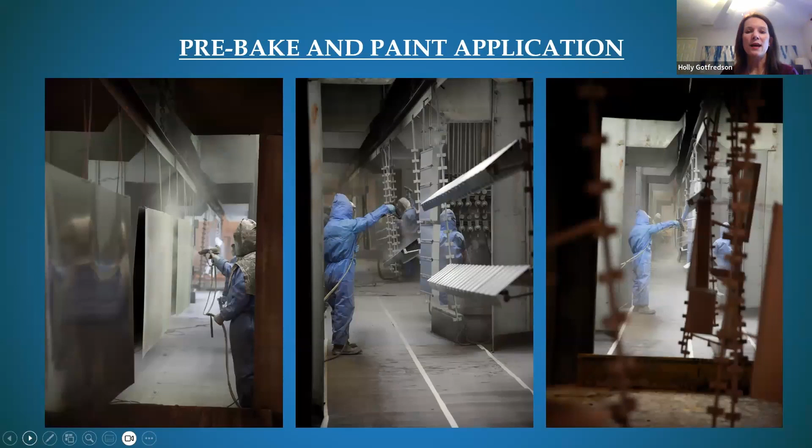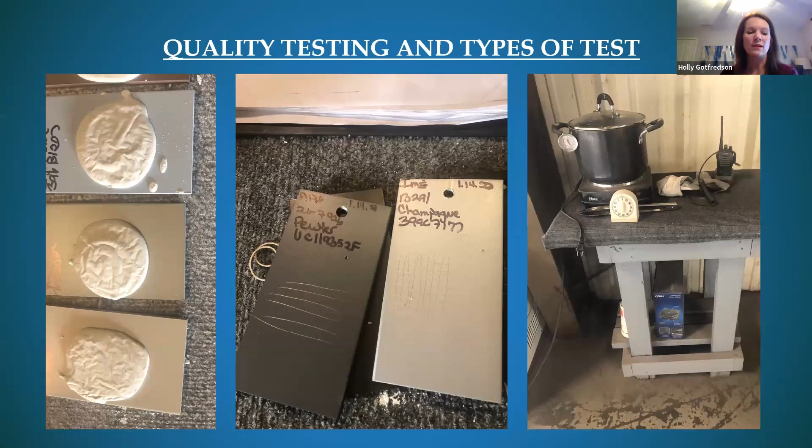It goes through a pre-bake oven, and then the extrusion coating is applied using E-stat guns, and those are electrostatically charged so that the paint actually wraps the part. And then, of course, once it's cured in our 200-foot oven and comes out the other side, it goes through a battery of quality control tests that meet and exceed AAMA standards, making sure that the mil thickness on all of those parts is exactly what it should be. And then it is shipped to a job site.

So that is a broad brush of perforated products, some of the options that are available to you to use them in your project design, as well as, you know, we talked a little bit about the coating options that are out there, as well as the processes for coatings.